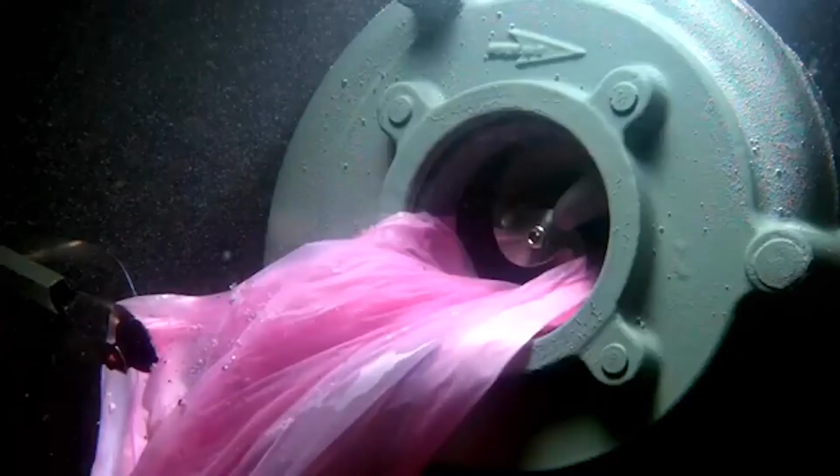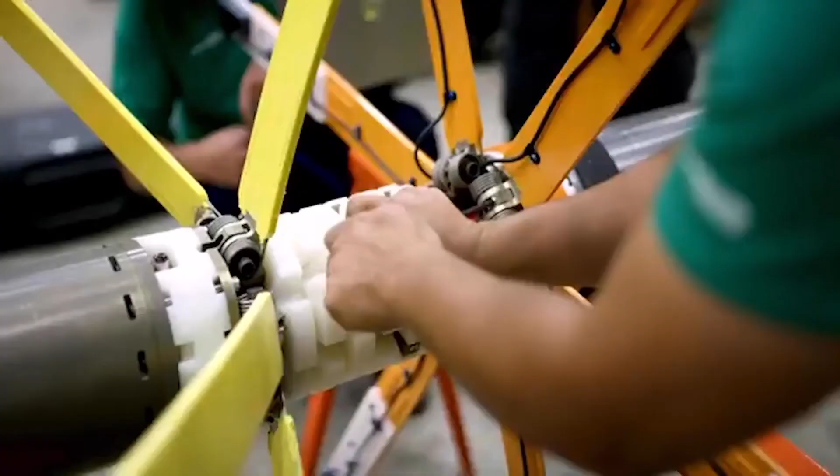Xylem is a Fortune 500 global water technology provider, dedicated to solving water and smart infrastructure challenges. We have a century-long track record of trust and reliability, providing leading-edge technologies and expertise and equipment to utilities, industrials, and other users of water, working closely with our customers to develop solutions that manage water more effectively and efficiently.

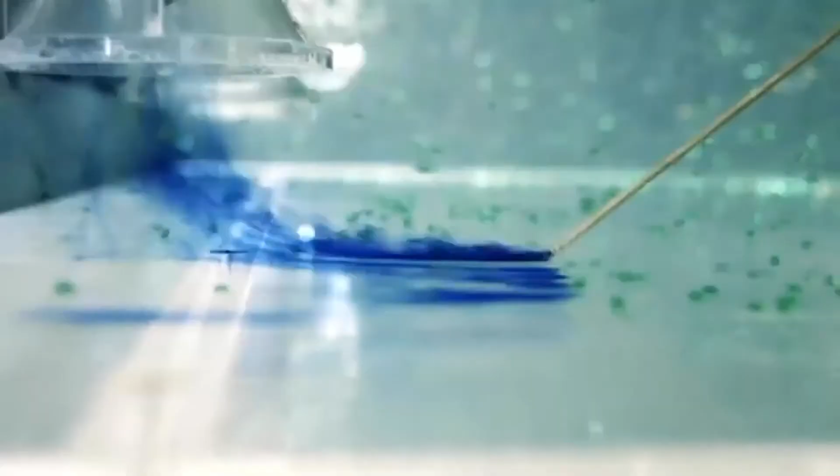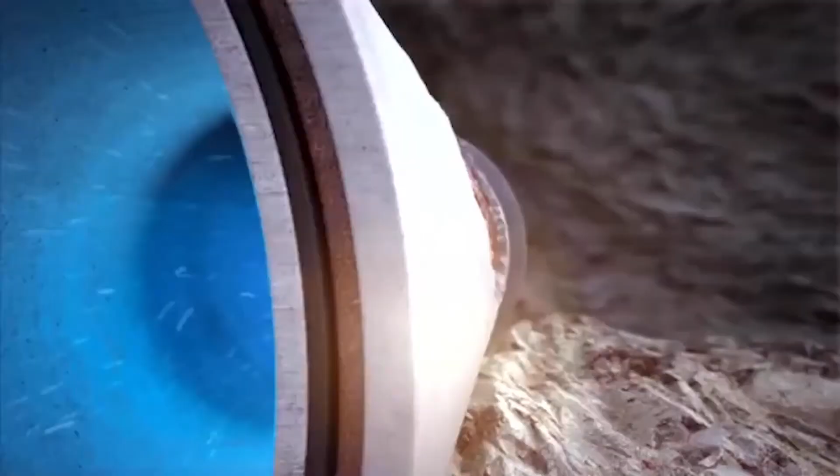All across the water cycle, we're leading the digital transformation of water, partnering with our customers and innovation leaders, discovering new ways to harness the power of data and analytics, delivering unprecedented insight that's optimizing existing water systems, and creating a future that's more water efficient to meet the world's water needs, and more energy efficient to protect the environment.

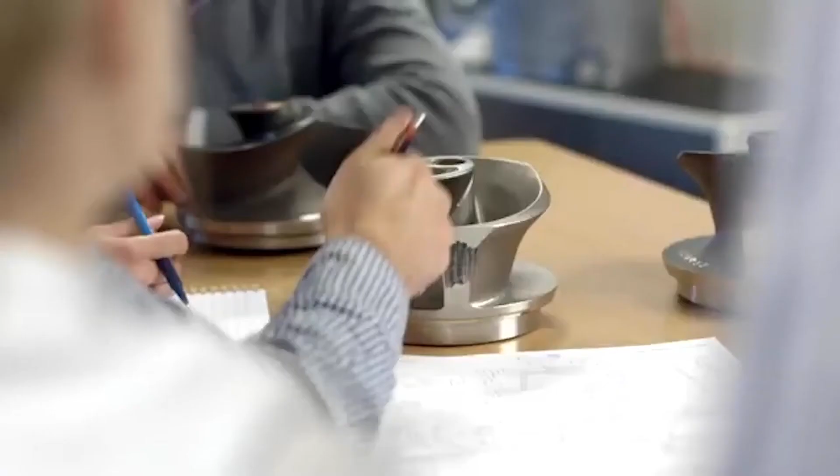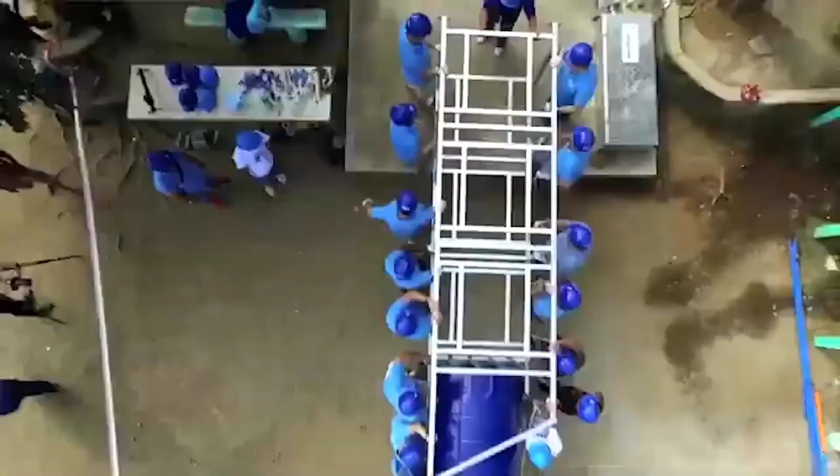Our commitment to sustainability is fundamental to our business strategy, guiding everything from how we design new products to our culture and people. Through our corporate social responsibility program, Watermark, Xylem employees have volunteered more than 230,000 hours over the past 5 years, educating about key water issues, cleaning up local waterways, working with our NGO partners to deliver drinkable water systems to communities in urgent need, and deploying our experts, technology, and equipment to help disaster-afflicted communities.

The world's water challenges are dramatically increasing, but so are the possibilities to solve them. Xylem is working every day to bring water technology and innovation to communities and people around the globe, raising awareness and reaching new audiences through partnerships and the power of sports, and helping create a world where water is more accessible, affordable, and safer for all.

Water is always moving, and so are we. We're pushing forward, pursuing the opportunity of a lifetime. We're Xylem, and we're solving water. Join us.

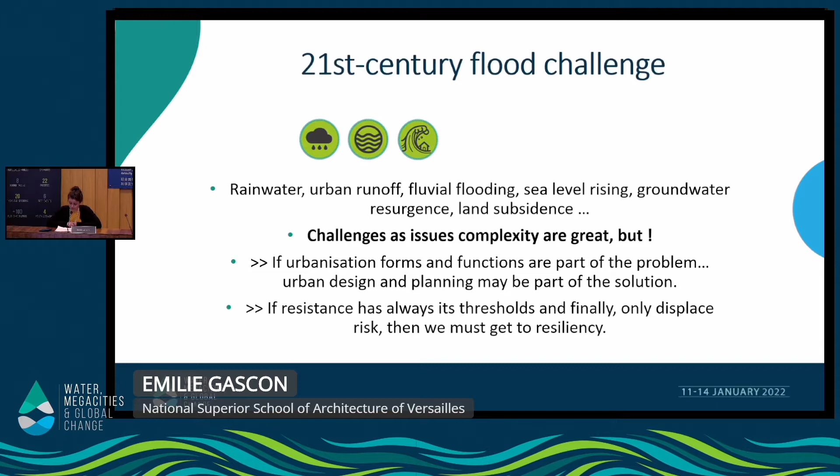These challenges and issues are very complex, but facing this complexity, some of the hypotheses are actually quite simple. If urbanization models, by their form and function, are part of the problem, then urban design and planning can be part of the solution. And if resistance always has its limits and only displaces risk, then we must embrace resilience.

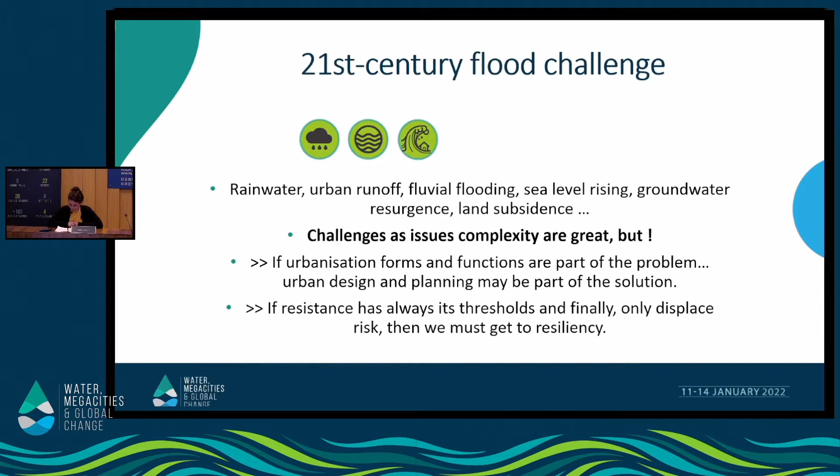Despite the difficulty and complexity of these tasks, it's interesting to note that there's a field of opportunity for new cultures in the 21st century, new water cultures. We have past examples and new research that attest to a window of opportunity. But be careful, I'm saying it is a window of opportunity, because even if a change of paradigm is encouraging, there will be limits depending on how long we wait to act.

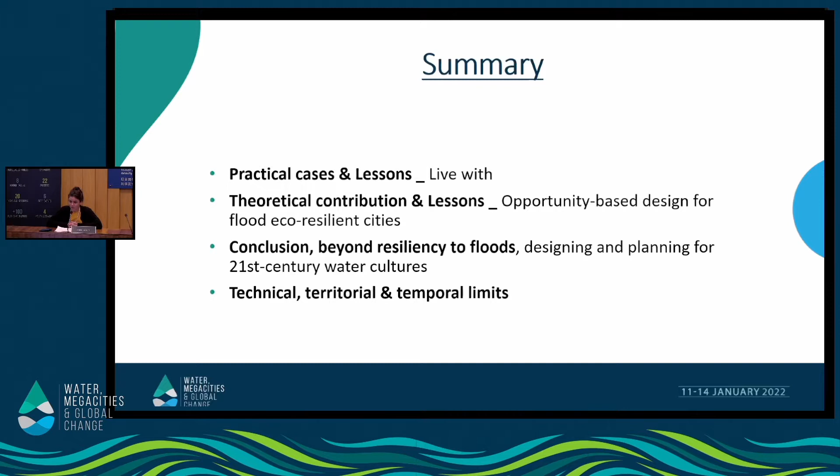In this presentation, I'll quickly present certain practical cases and the lessons we've learned from them, and also present a theoretical contribution on opportunity-based approaches for resilient, eco-resilient cities to flooding. Then I'll conclude on the idea of water culture, and I'll also warn against some of the limits to these concepts.

When you analyze certain practical cases, you can observe that when considering waterfronts from an architectural point of view in private housing, there is an exemplary practice: living above water territory and accepting this position. You can see this in Thai traditional stilt houses, the Ruean Thai, as well as Thai traditional floating houses, the Ruean Phae, which show not only common sense but also a diversity of typologies and manners of living with water. In dry times, you live on the lower floors; if it's wet, you live on the upper floors, depending very much on the meteorological conditions.

This is an example of living installations, but not the only one. There are also examples of mixed public and private practices that organize urban life with various activities along rivers and canals. The city of Xitang in China is built along the waterfront, showing a way of living with water thanks to a whole system of galleries, with a lot of variation and diversity in the relationship between public and private spaces and the water.

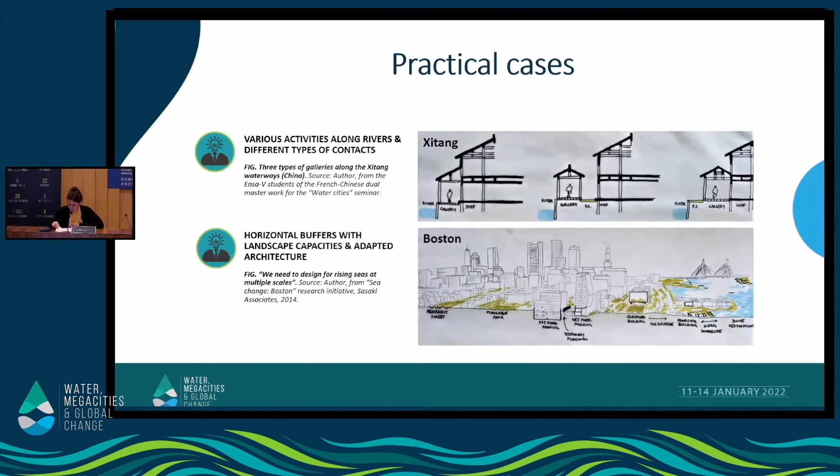We don't have the time to show you the whole diversity of the various projects there, but you need to remember that the contact and the substance is important. The land is not static, and you need to see it as a multi-layered, thick space with its own capacities.

This paradigm change in the waterfront is also observable within city districts when it comes to rainwater. Blue and green strategies are indeed taking the lead to manage urban runoff. Without going into a whole list of cities, it goes with Copenhagen, New York, Philadelphia, Singapore, or the Chinese program of sponge cities—there are a few strategies worth looking at.

What I'd like to underline is the potential for transformation thanks to these blue and green strategies. If you take two cases, first of all Copenhagen, there's really been a transformation of the urban landscape there. There's the Ramboll project, of the Ramboll Studio Dreiseitl, and there's many different mechanisms made up of canals and parks and streams that have been deployed.

But what's most important is there's a synergy between green, blue, and mineral elements to direct water towards areas where it is desirable, all the way to the sea. And this is an interesting project. In Copenhagen, there's a transformation of the perception of the city that needs to be highlighted.

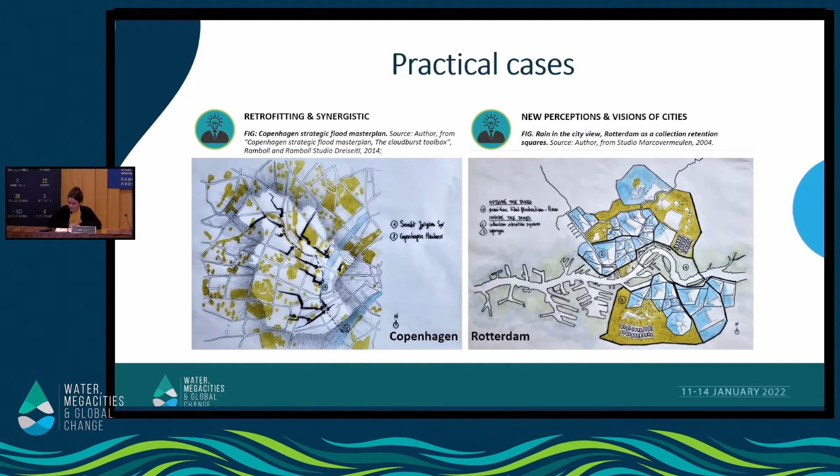So there is a certain artificiality in this territory, but which takes on board more of a geographical angle. But this is an interesting case because it really is a hybrid system. And even though they use similar systems, they give you different perceptions of the different components of the city.

As a conclusion to this first section on the different practical cases, it can be said that dealing with the vision of the territory in this hybrid way that mixes design, engineering, ecology, and economy, by working all of this together, allows you to diminish risk and also to reconnect with the land, with the territory, in a dynamic way. This provides lots of resources and possibilities.

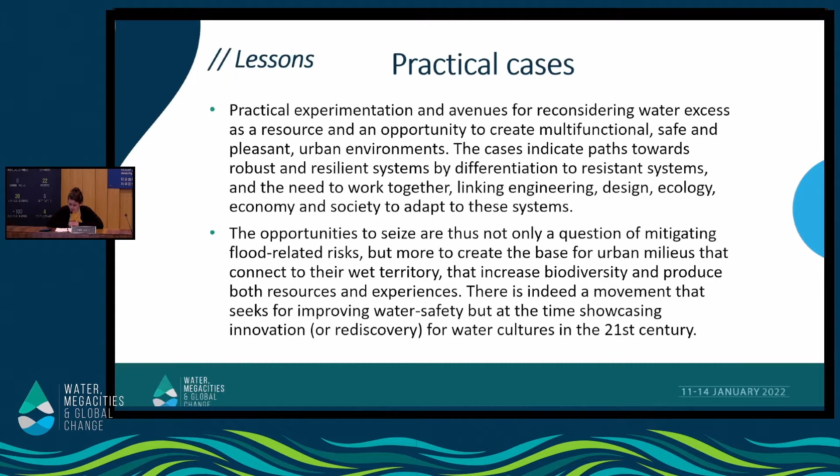And by studying these practical cases, I saw that there were actually quite few theories based on this. So faced with the concept of living with, this concept seems to correspond to a positive vision of flood risk, but only a few scientific research works introduced the concept of opportunity into flood risk management. This is what I worked on in my doctorate.

The idea is to validate the concept of opportunity when it's applied to floods, but also we need to develop a design based on opportunity in order to reinforce flood resilience in cities. I will not explain the methodology to you, but you can read it yourself if you want to.

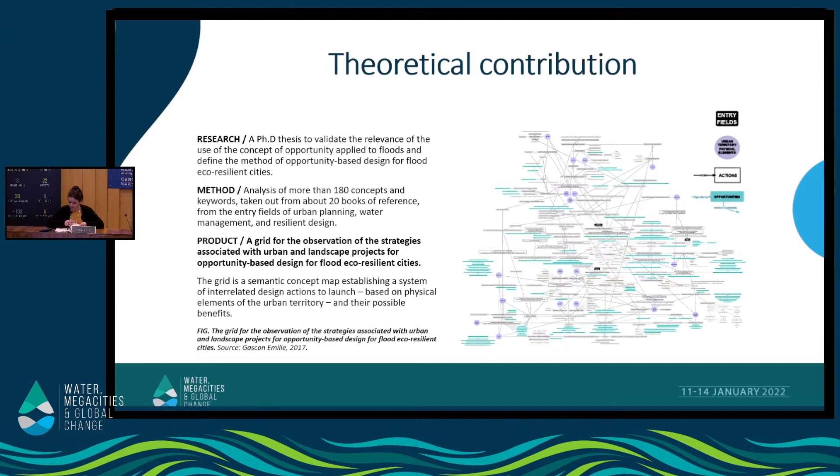What I'd like to do is present to you the result of this study, which is a list, a grid of conclusions of these different strategies when it comes to this concept of opportunity and risk management. This is a conceptual list that's based on the physical elements of the territory that can lead to potential benefits. A summary of this conclusion will help you understand the logic that underpins this method.

The main point is to establish synergies between flows and processes that are linked to the physical elements of the territory, linked to water flows, water circulation.

The starting point is to deal with water under all its forms as a resource and to use the variation of these flows to organize and reorganize different functions, different capacities and characteristics of an urban environment. So the idea is to think of water at every level—buildings, districts, cities—and the interactions at all these different scales, in all different environmental conditions, as a means to transform the relationship between the urban environment and water. This practice can help restore the territorial capacity and also restore new functions.

And it's always this circulation of water in the territory that facilitates the production of other resources, such as nutrients, food, and so on and so forth.

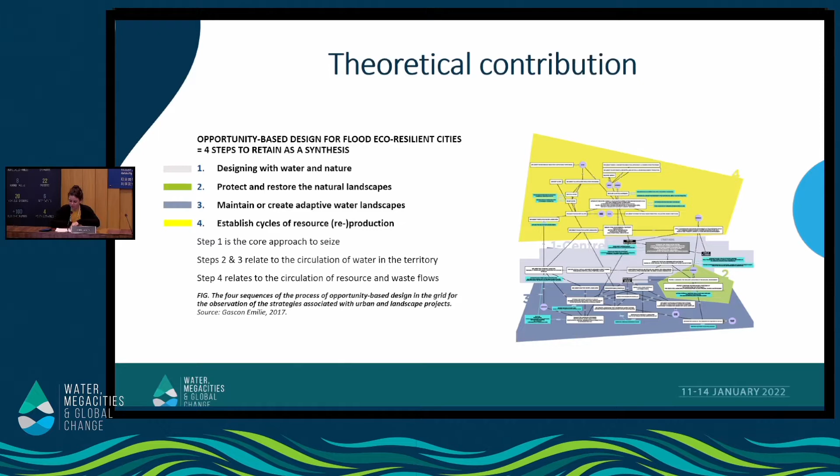This method can be summed up in 4 points that you can see on the slide. The idea is really to understand that starting from the principle that floods, and especially floods that can provide an initial resource, by basing yourself on this resource, you can implement systems that absorb the water loads and create conditions for other social and environmental advantages.

As a main lesson of this work, one can highlight that opportunity-based design aims to manage and exploit the interactions and synergies between the physical elements of the urban territory. This is an approach that creates virtuous cycles and cascades down opportunities. It links different functions and uses in space and in time.

So there are different advantages that go from air purification to educational activities, but the potential is mainly the understanding of the physical territory and combining constraints and opportunities, which can lead to interesting ideas to create new multifunctional systems with interdisciplinary and multi-temporal uses.

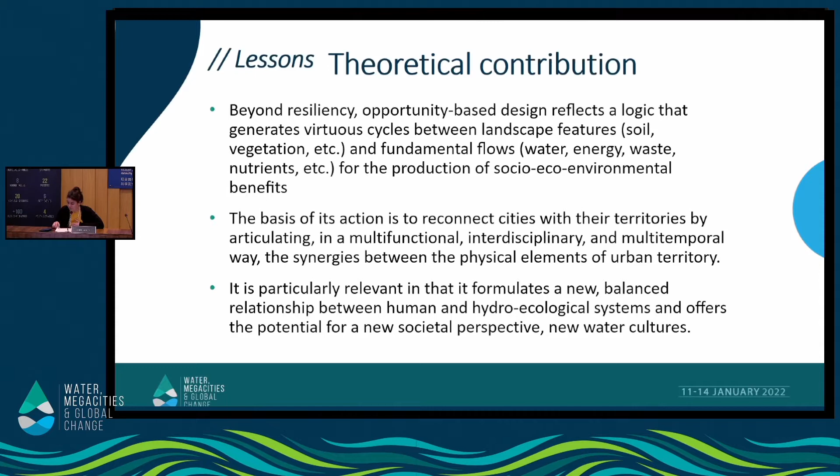And what you need to understand is you can reconnect cities with the landscape from a local innovation point of view, but also with a greater objective of regenerating the landscape and creating new water cultures.

Finally, first conclusion from a theoretical point of view: the opportunity-based design method offers potential in response to the complexity of urban flood territories. Through diversity and proactiveness, it demonstrates that creating synergies and benefits in a cascade model is possible and is relevant.

Practical cases are already showing that water urbanism can be implemented. It shows that there are opportunities to be seized, but you really need to be careful and pay attention to the window of opportunity and to our capacity to reformulate and to reinvent the urban landscape.

My second conclusion is that faced with these floods, there are three main hypotheses. First of all, we fortify ourselves, we reject water, but we already know what the technical limits exist to this approach to combating floods.

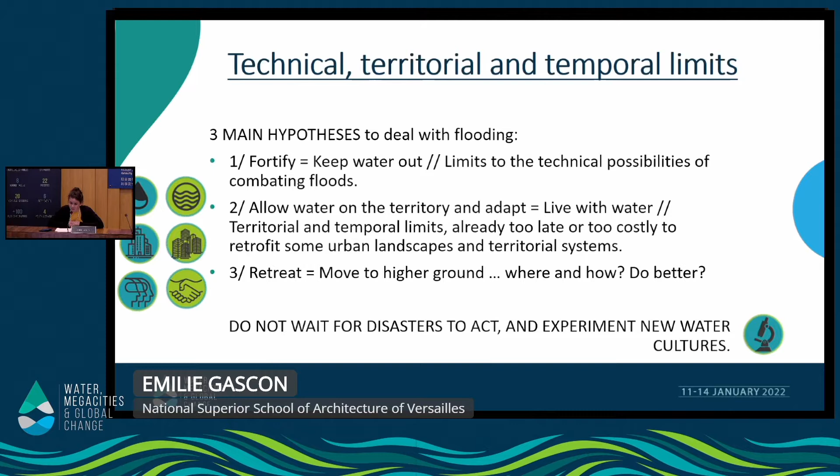The second hypothesis is to accept water on the territory, to allow it and to adapt to it, and that is the argument in whose favor I am talking today, and the topic of this presentation. But you do need to be careful of the territorial and time limits of this approach, because it's already too late or too costly to retrofit certain urban landscapes and territorial systems.

And so in those cases, there's a third option, which is to retreat, to move somewhere else. Where can you go and how can you go there is obviously a question you need to ask, but also if you retreat, you also have to be careful not to repeat the same mistakes that were made before. So you really need to take into account the complexity of the relationship between water and the landscape in order not to make the same mistakes again.

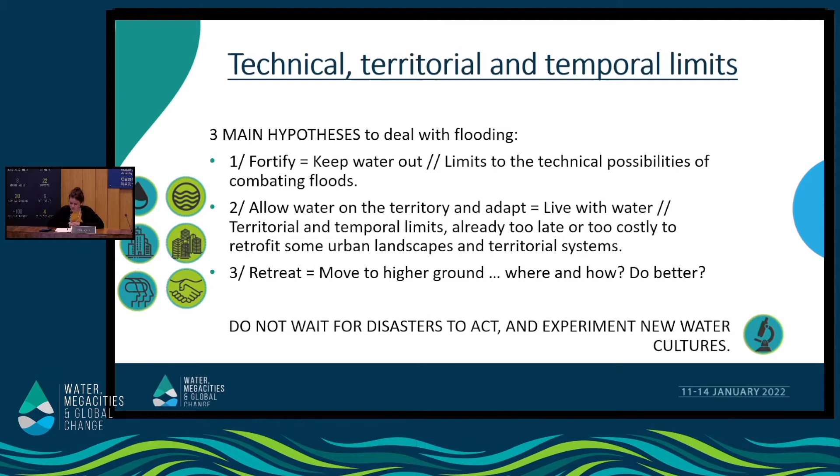So let's start experimenting with new water cultures as of today. And thank you very much for your attention.

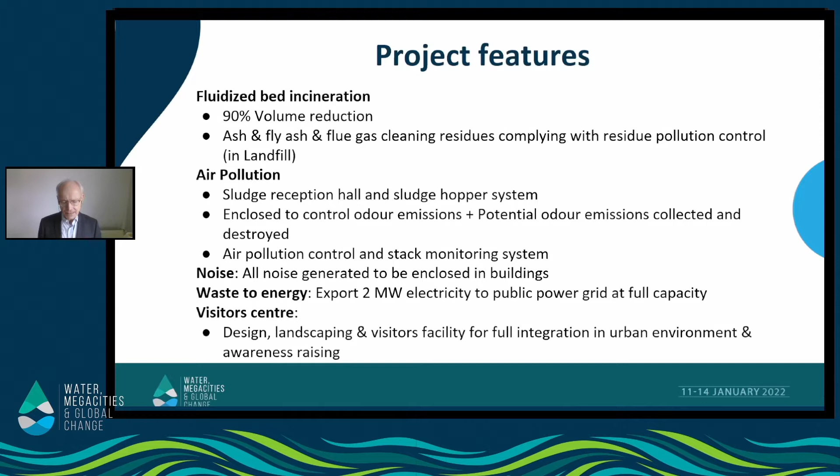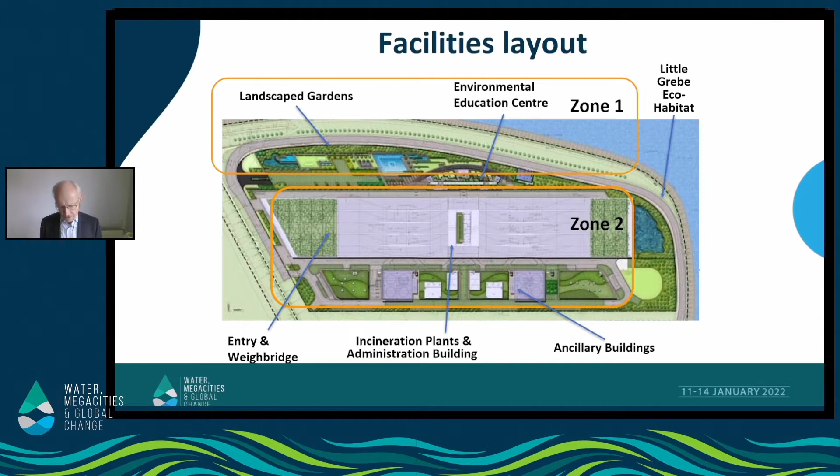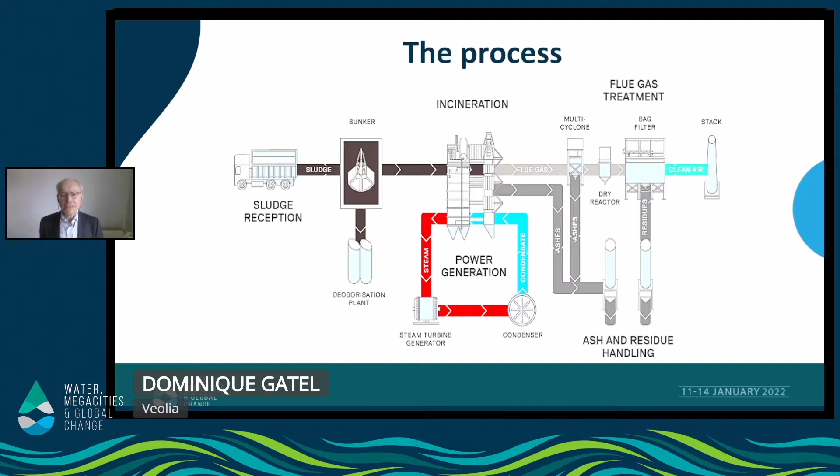Before we leave the technical matters, I wanted to show you this excerpt from the website, which I encourage you to visit, showing the process. On the left side, you have the sludge reception. The sludge is carried to the site by boat, and then trucks carry the sludge from the boats into the facility over the remaining 300 meters.

There's 2 units of the deodorisation system per plant. At the other end of the process, you have the flue gas treatment system with emission control in the stack, with in-stack monitoring to ensure strict compliance with the EPD standards, and also basically the European standards in terms of emission in the air. Right at the heart of the process, you have 1 steam turbine per plant, generating 2 times 40 megawatts of electricity. There are also heat exchangers to provide heat and cold for the air conditioning of the facility, etc.

A quick word about water management on the site. To make it short, T-Park is fully autonomous with a zero wastewater discharge policy. There is an RO desalination unit to provide processed water and demineralized water for the boilers, etc. There's also rainwater harvesting for non-potable use, and the wastewater of the site is treated for reuse in irrigation, flushing, and cleaning.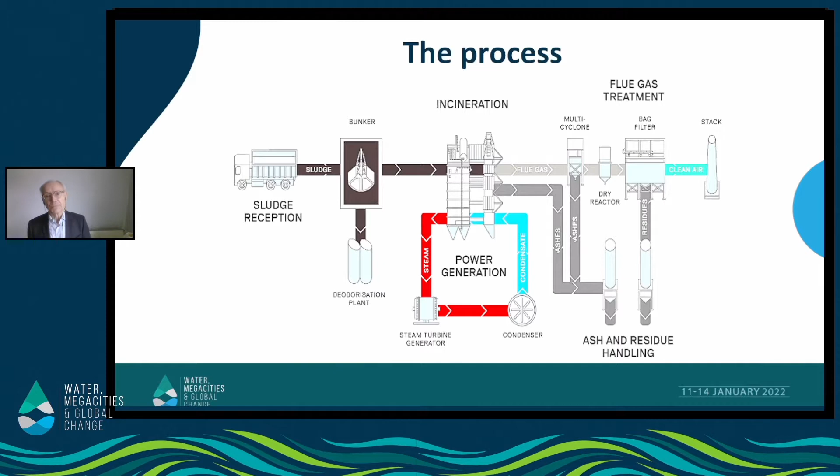What makes T-Park unique are the dimension and the technical design, and the efforts to save energy and waste. But big efforts were also made to integrate the facility into the life of the Hong Kong citizen. It starts with the design: the building echoes the waveform of the hilly landscape in Hong Kong, with the landscape garden in front of it. Big attention was paid so that this would not simply be an industrial facility—it is an industrial facility, but also meant to be something at the core of the life of the Hong Kong citizen.

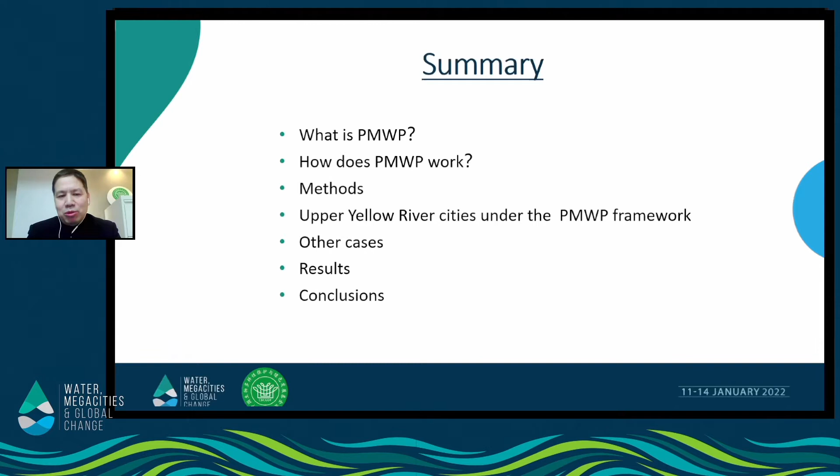What is PMWP? It is the Partnership of Megacity Water Source Protection, a water resource protection mechanism that works together, involving multiple parties, which we started. In fact, it started very early with the Miyun reservoir protection of the local community. But during 2015, we joined and participated in the workshop and offered some funds to officially establish the partnership, including CCGDF, our Foundation for Biodiversity, and the Beijing Forest Society, and IUCN in China, Forest Trends USA, and the China Society for Soil and Water Conservation. We focus on the protection of drinking water sources, starting with Beijing and extended along the Yellow River in the northern part of China.

How does PMWP work? We get some funds from downstream enterprises and individuals, and we provide the fund to upstream water source protection projects, including rangers, policy advocating, and other related projects. For the downstream users, we set up a mechanism for them to purchase watershed ecological services from upstream farmers in the communities.

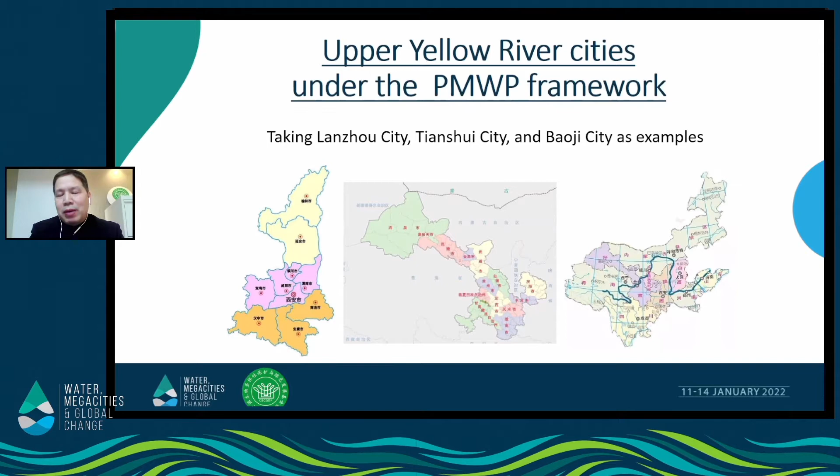Finally, we wrote to the Ministry of Environment regarding the environmental impact assessment organization, in this case the Institute of Chinese Academy of Science. The EIA organization was fined 2 million because of this, and this project was stopped. Eventually, people, government, scientists, and civil society all participated and welcomed our stopping of this. We encourage starting a new culture, a new understanding. We need to preserve nature instead of promoting new ecotourism projects.

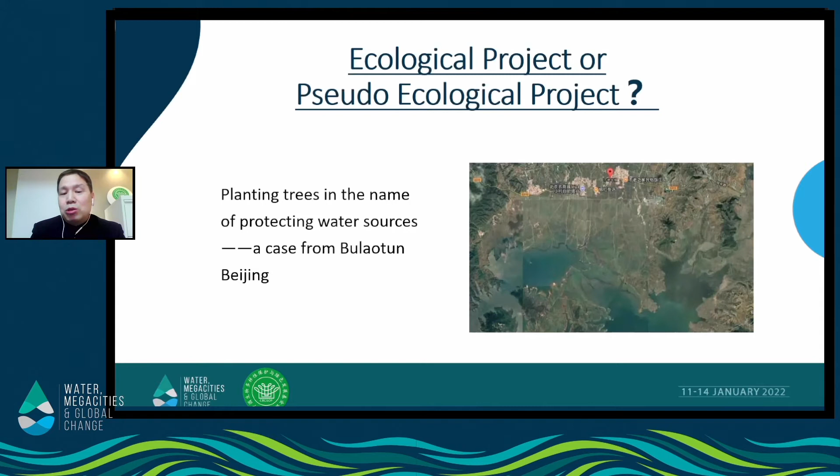This is another project in China - we have a very big promotion of planting trees. This is in Beijing, a floating wetland, but because of the pressure of planting trees, they started planting trees in the wetland, which does not fit the new culture of water. We need to protect the wetland instead of planting trees.

To improve the existing supervision and administration mechanism is the major number one task, and we think this is what we really need. So next, the new culture of water is the core part, but we extend it to a new civilization. A new civilization will include the administration, the legal system. Culture is the whole part, but our experience encourages improving the legal system and the administration - all these things must change. Also, giving full play to civil society and social organizations, improving public awareness will be very important.

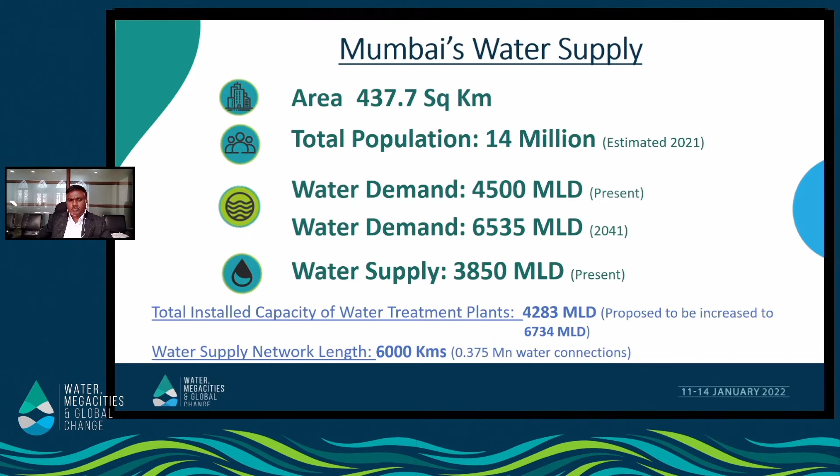Next slide, please. When we think of the new water culture, our municipal corporation has been in existence for more than 200 years, and the water supply department is one of the oldest. So there has been a culture ingrained in the department. For example, we own and operate about 7 large dams or reservoirs that we built.

What the department sees is that initially, when we built the first 2-3 large dams for drinking water supply for Mumbai, they were relatively peaceful affairs. None of them objected to it, so we could build those dams, and those dams are serving us well. Even today, we get adequate water from them.

But as you can see, there is a huge gap between demand and supply. Currently, the water resources will slightly fall short, so we have plans to construct new dams. But now the current theme is not to cut trees, and the carbon footprint will be very low. These are the current themes.

So the department is also trying to ingrain this new culture. For example, we have another dam project in the pipeline where we can add another 400 million liters per day of capacity. But to execute the project, the cost to the environment would be cutting down about 0.25 million trees, which is totally objected to by the local population.

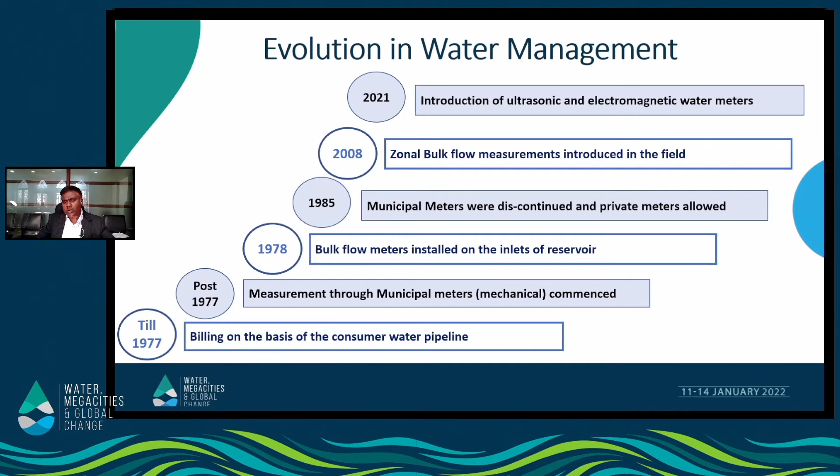For example, this slide shows what we have traveled over a long period of time, starting from no meters to mechanical meters, now to electromagnetic meters. We are trying to measure water at each stage. This is an evolution going on over the last 30-40 years. Next slide, please.

But like I said, the technology adoption can be speedier if the water is priced properly. So that is a real policy issue for administrators like us, where the huge public demand is not to pay the full charge, but they expect great subsidy.

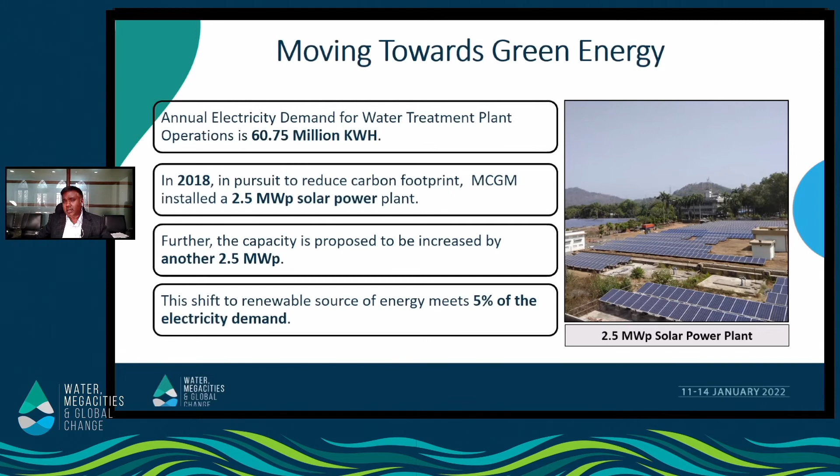So when it comes to the new water culture, like I said, the energy cost has to come down and the carbon footprint has to come down. So the Municipal Corporation of Greater Mumbai has already implemented 2 huge solar projects. Apart from this 5 megawatt project which is implemented, we are in the process of implementing another 100 megawatt floating solar project that will be done on one of our dams on the water surface. So that is also planned. This is only to save energy as well as to make it green. That is the steps we have been taking. Next slide, please.

But during the summer time, even though we have this much water in our city, our dams run slightly dry, which results in water cuts to the people. So we have to impose water cuts, we have to ration the water. So we have both the extremes. On the monsoon, we get extreme flooding issues. On the summer, we have water rationing issues. So the rainfall affects us badly.

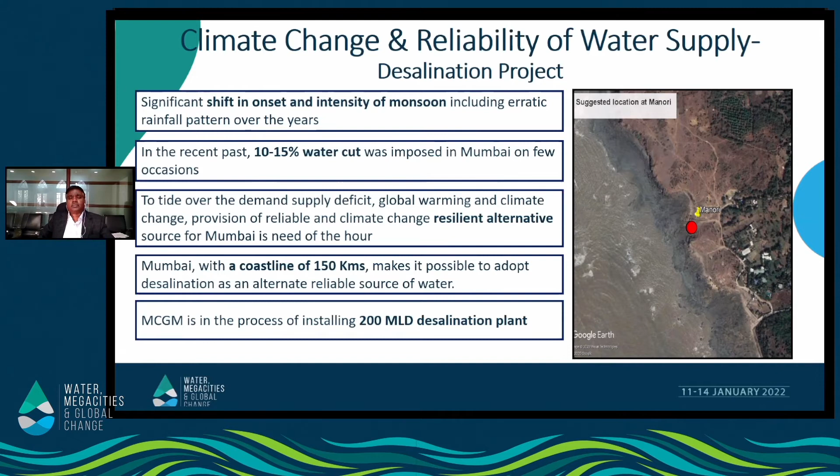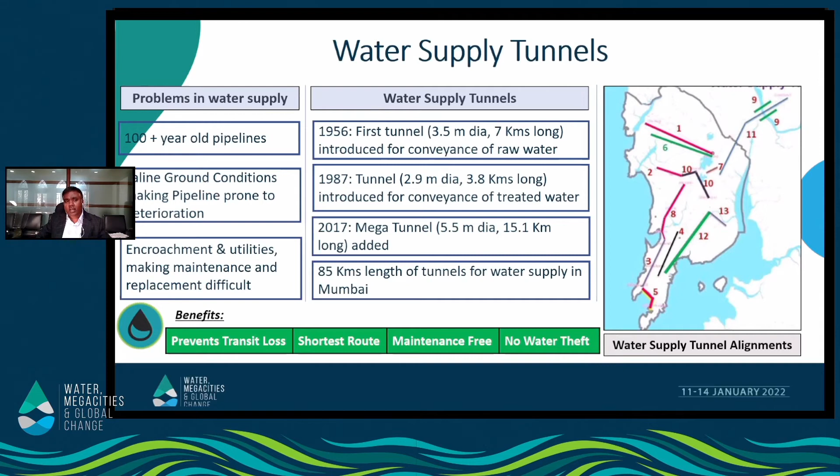Next slide, please. So we are proud to say we are one of the local government bodies who have spent large amounts of money creating this tunnel network. In our city, we have more than 85 kilometers of deep underground tunnels, and we are one of the oldest to do it. We have been doing it since the 1980s, more than 40 years. We have been transferring water from faraway dams through tunnels. One of our dams is located about 100 miles away, so we are transferring water from those dams also by tunnel as well as surface pipelines. So we are one of the leading corporations in Asia to adopt these types of tunnel technologies. Next slide, please.

So like I said, the tunnel boring machines, the SCADA systems, and the new dams, the roller compacted concrete dams - these are the things we have been adopting. But the issue we face every time is that adoption of new technologies requires huge capital expenditure, and that can happen only if water is priced properly. So for us in Mumbai, one of the major issues is how to recover the operation and maintenance costs, which we are currently subsidizing from other accounts. That is one of the major issues, but we are working on it.

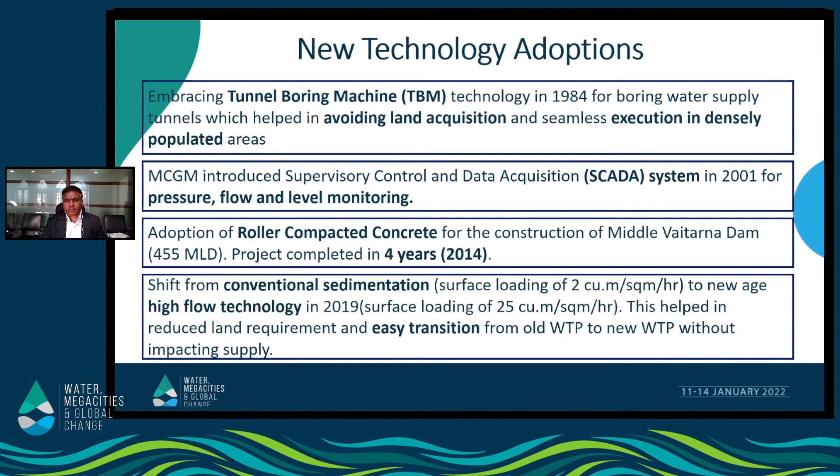Another opportunity in the new water culture is that we are supplying about 3,800 million liters of water every day to the population for drinking purposes. In the process, we are creating almost 2,000 million liters of gray water, which is let down. We are currently in the process of appointing consultants, and within the next 5 years, we are planning to recycle and reuse this water to the maximum extent possible. Even our sewage treatment plants, we have been asking for tertiary treatment followed by potable treatment.

So for the next 5-6 years, our focus as a municipal corporation will be to have an environmentally sensitive approach towards creation of new resources and diversification of water resources. Unlike the past 100 years, we are now very keen to look at diversification of water resources, including desal plants, and we are focusing on recycling and reusing the water supplied in huge quantities to our population. To achieve this, we are also looking to change people's mindset, because our corporation can spend the capital expenditure and put recycling plants in place to create potable water.